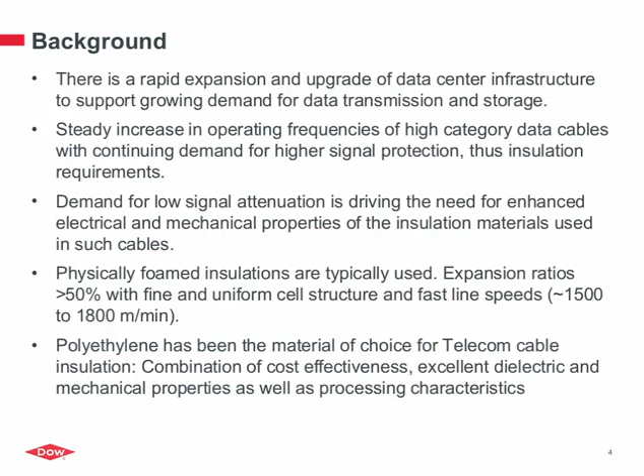On the next slide is our objective in doing this work and the targets. Our objective is to develop an improved high-density polyethylene cellular insulation. Obviously, there are products out there, and we want to improve even further. We would like to have this insulation in a single compound, so customers do not have to blend, eliminating this blending step, which leads to inhomogeneity issues at the cable manufacturing step. So our goal is to deliver a fully formulated, ready-to-use compound and eliminate any potential path for introducing a defect.

So in terms of the advantage of the proposed technology, number one, it's ADC-free. ADC stands for azodicarbonamide, or AZO in short, which is a known chemical foaming agent, also nucleating agent. And the reason for that is that in Europe specifically, there is a REACH directive where AZO has been put on the list of substances of very high concern. So obviously the industry would like to have a REACH compliant system that would not have this problem.

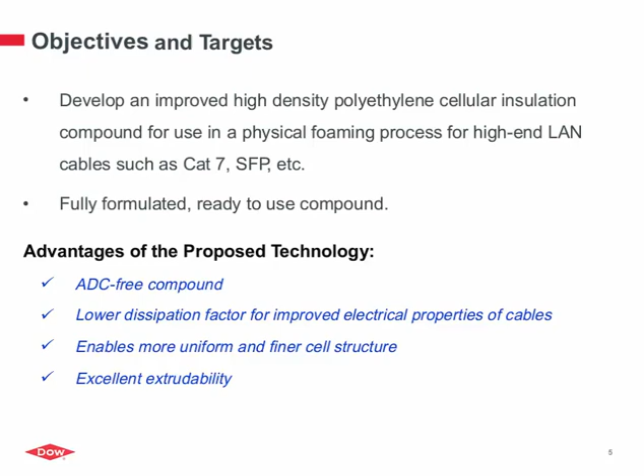The second is that we would like to have a lower dissipation factor compared to an incumbent high density system for improved electrical properties of the cable itself. Obviously, as I mentioned, this uniformity and the fine cell structure is needed. And because of the speed that these lines run, there needs to be a compound that processes with very good processability. So this line speed imposes some rheological constraints to deliver the processing speed.

Why is this important in terms of the dielectric materials' influence on the losses? Because what matters really are the losses in the cable itself. I captured here what is affected by the insulation of the dielectric material. Obviously, a lot more goes into a cable design, and a lot more can be done by the design to reduce the losses. But in terms of the dielectric insulation, the first one is the attenuation, which is signal loss. It is influenced by the dielectric insulation itself, its properties, which are the dissipation factor and the dielectric constant primarily.

And because the design of the cable imposes a conductor size, conductor separation, that will translate into the thickness of the insulation. So the dielectric materials come through that way as well. The impedance, which is anything that impedes the signal, it is the dielectric constant of the material and also uniform adhesion to the conductor. That's why these constructions, most of the time, are core and shell layers, and this foamed insulation will be in between.

Internal crosstalk also is affected by the insulation, and it comes through more on the mechanical integrity, because to reduce that, there needs to be twinning, twisting, and these induce radial forces on the insulation, so compressive forces. And if the insulation is not of robust mechanical properties, the foam insulation itself can collapse. So as I mentioned, this is not all. The overall performance of the cable is achieved by a combination of both, right? The non-polymer design parameters, but also the proper selection of the insulation material itself.

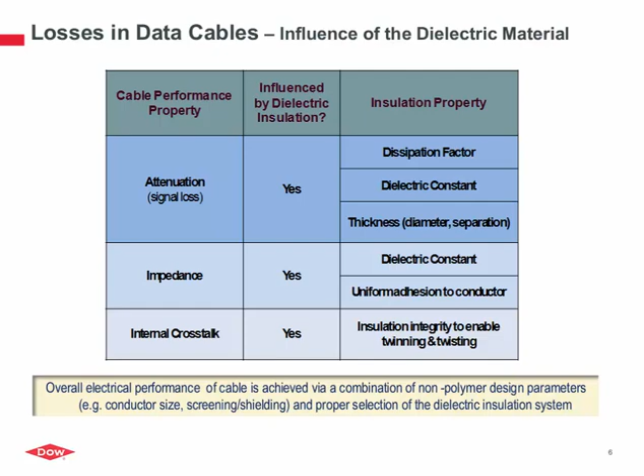Just a brief background of why we need to foam. Number one, what foaming means: if we say 50% foaming, that means 50% of something else, which is really the gas that is entrapped in these cells. And generally, the gases that are in the cells have much better dielectric properties, whether it's air, nitrogen, argon, or carbon dioxide. All of these have better dielectric properties than the polymer that is used. And so that's why when we foam, in this graph here, it's a simulated calculation of how the dissipation factor responds. And you can see it's a significant reduction in the dissipation factor by foaming. Here we are presenting the dielectric dissipation factor, but the same goes with the dielectric constant itself.

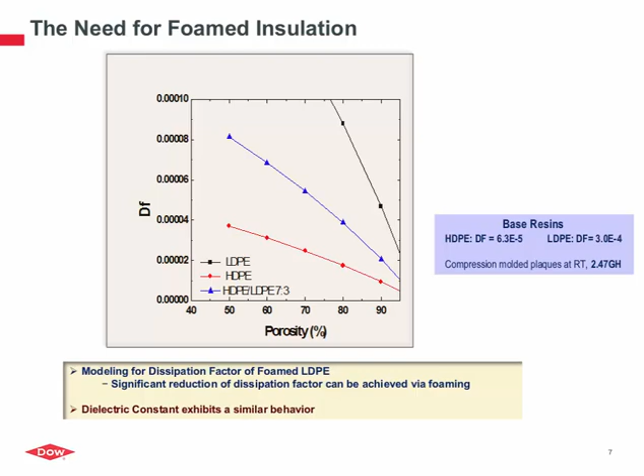Just a brief background of how the process generally works. It is generally a single screw system. Of course, lines are different. There are tandem lines and so forth. But for a high-level description, what we have is the polymer itself, or the polymer compound that is properly nucleated, that is fed into the extruder, melted and pressurized, and pumped to a high-pressure zone where the gas is injected. This is the foaming gas itself.

And then what happens, there is a gas-polymer mixture, and as the material is driven to a high pressure, there is dissolution of the gas in the polymer melt. So you have a homogeneous solution that has the gas, and as the pressure is released at the exit, then the foam expands, and I have pictures to show that. So this is the gas injection process, which is generally used for the topic that we are discussing today.

Obviously, there is the chemical foaming approach where the compound is prepared with the chemical foaming agent. That's what CFA stands for. And it decomposes during the melt extrusion step. What happens is, relatively speaking, a high level of the foaming agent is needed. It's easy to implement because it's ready to go. There is no gas injection metering and so forth. However, it's limited to about 45% foaming level. And there is the other issue: this is essentially an impurity. What we are introducing itself is an impurity, and when it decomposes, it results in byproducts that are also electrical impurities. So the combination of all of this does affect the electrical properties of the insulation.

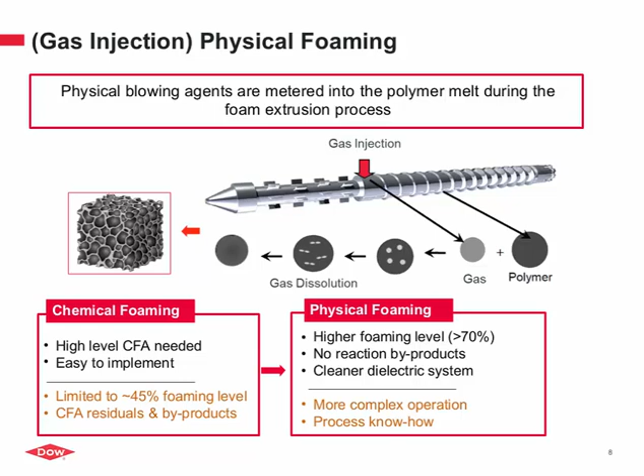Just to recap on what happens mechanism-wise in this foaming process. I already described the evolution of the melt plus gas, the formation of this polymer gas solution, and then with the exit and the rapid depressurization and cooling, and of course the presence of the nucleating agents, we enable the bubble growth and stabilization via the cooling process itself.

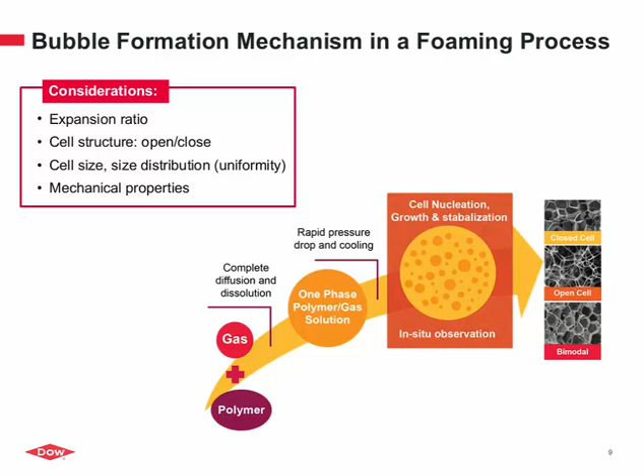When can we get a closed cell structure, an open cell structure, or a bimodal or multimodal structure? Of course, this is controlled by the rheology of the system that is put into the extruder. If we go to the next slide, why is this important? The cell structure, that is.

So from a mechanical standpoint, the foam compressive strength is significantly dependent on the presence or absence of open cells, and also at a similar density, a smaller cell size would result in a higher number of supporting walls. That means higher compressive strength.

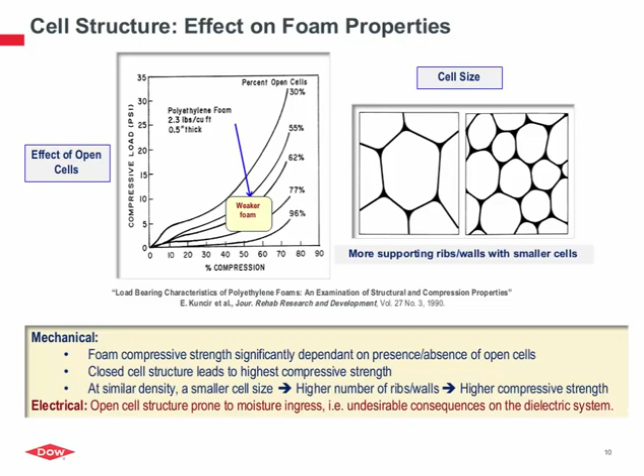So if we have a weakness in the dielectric layer, for whatever reason, contamination, moisture, or breakdown in the dielectric path, that would all result in higher spark faults, and of course the cable is not usable.

So where do we come in this space of how to make this foam? We come from the resin technology side. We come from the nucleating technology side. And of course, we look to the end user, and we work with cable manufacturers on the processing side. This is extremely important because equipment is different. Extruders are different in designs, whether it's the heating profile, the screw design, or the die tooling and so forth. All of that comes in making this high performance insulation.

However, from a material or compound designer standpoint, we look at the rheology, we look at the nucleating technology, and of course the resin technology itself. So it's really these three parameters that come together to deliver this high performance material.

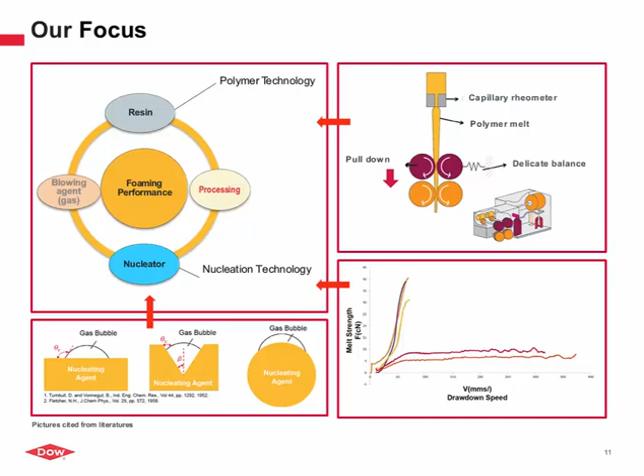So what we have done, we produced some foamed compositions in which we are using a typical high density based system, which is nucleated properly for gas injection foaming. We use that as a control. That's the CHDPE system. And then we use two modified systems, MHDPE1, modified high density system 1, and modified high density system 2.

All of these were prepared via compounding on a twin screw extruder, 18 millimeter 48 L/D, with the compounding processing information shown here. These were pelletized and dried prior to foaming on an extrusion line. We used a single screw extruder, 50 millimeter diameter, 40 L/D, at 7.5 kilograms per hour throughput. We used carbon dioxide as blowing agent injected on the extruder, with the temperature profile shown, and the extrusion line had a static mixing head in the post-injection section.

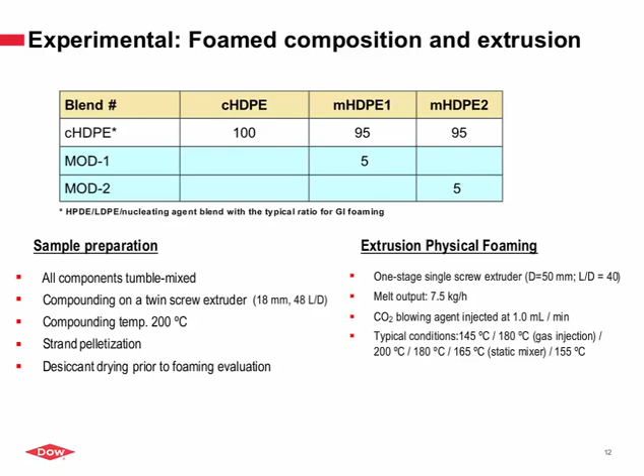For the electrical properties, we used an Agilent 8753ES analyzer on 50 mil plaques. These are solid plaques, so all data we are showing are on solid plaque, at a frequency of 2.47 gigahertz for the dissipation factor and the dielectric constant. The density is measured according to ASTM D792, and the expansion ratio is calculated using the specific gravity of the foam versus the unfoamed material.

For the cell structure, we analyze the extruded foam with scanning electron microscopy, and we do image analysis on the electron microscope pictures themselves. That data is put into JMP, a statistical package, and we use a Tukey-Kramer type of model.

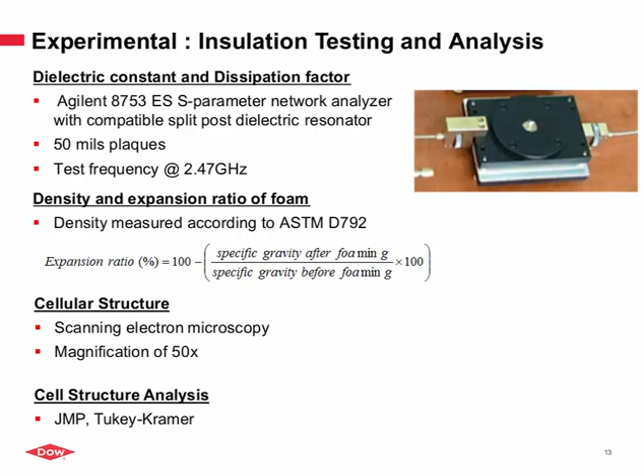From an electrical standpoint, the control has a typical dissipation factor and dielectric constant for these systems. Modified system 1 has a slightly lower dielectric constant, which is in the positive direction, and the dissipation factor is more or less equivalent to the control. Modified 2 has a slightly lower dielectric constant; however, the dissipation factor was much higher compared to the control.

I'm showing here the extrudate coming out of this foaming line. One observation is that in the control system, we can see a transparent region at the die exit, which is indicative of really unfoamed melt that is coming out of the extruder die. And the foaming is delayed post-die.

Comparatively speaking, both the modified systems do show significantly earlier foaming, which is indicated, number one, by the absence of this transparent region, which is polymer melt. And the second is when we measure the extrudate foaming angle, both modified systems had about 46 degrees theta angle versus about 15 degrees. That's really 3 times the expansion angle compared to the control system, which is qualitatively indicative of improved foaming for both modified systems.

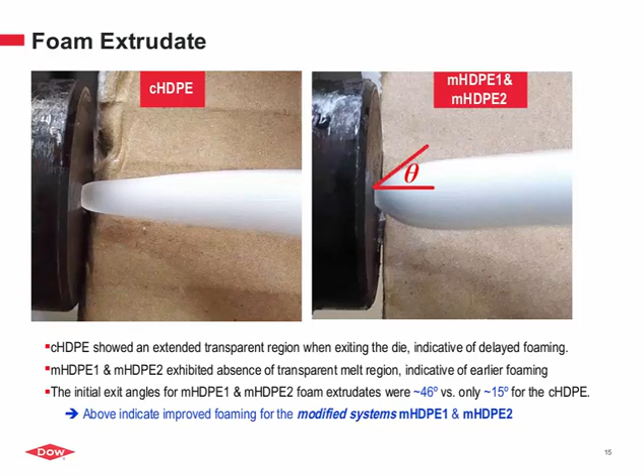Obviously, this is not enough. One has to go to the microstructure itself, do the microscopy work, and see if this is real. So these are the microscopy images, SEM pictures. The scale is 1 millimeter, shown at the bottom of each image. And what one can see, number one, qualitatively, there is a reduced number of large cells in both modified systems compared to the control. And also there is a larger number of total cells in both modified systems compared to the control.

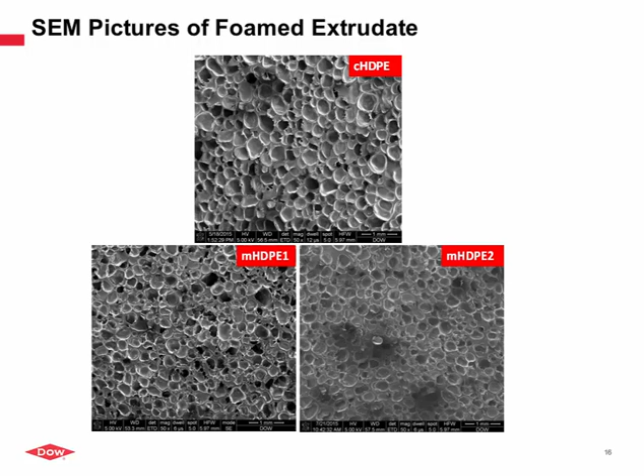So when we go to the quantitative analysis via the image analysis, and this is a compilation of several samples, what we see in the control system is a broader size distribution. Number one, the mean cell size is about 250 microns. The total number of cells is about 400. Comparatively speaking, in the two modified systems, the average is about 189 microns compared to 252, and in the second modified, it's about 213. For both modified, you can see it's 534 cells and 472 respectively versus about 400 for the control.

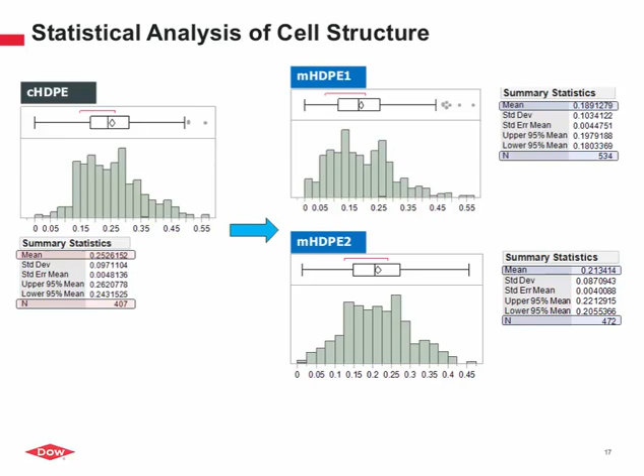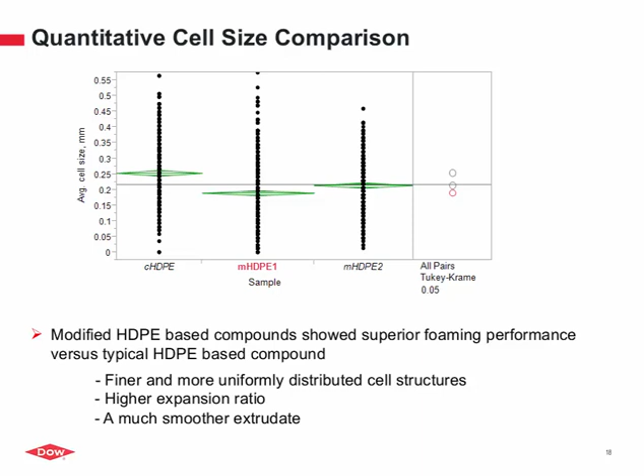So these modified compounds showed superior foaming performance versus the typical HDPE system, finer and more uniformly distributed cell structures, and a higher expansion ratio, which will come in the next slide. From the images, we also saw a very smooth extrudate coming out of the line. To summarize the foaming performance, for average cell size, both systems clearly differ from the control. The expansion ratio as well, which is important. So we have about 73%. These were all extruded under the same processing conditions, so we are comparing compound differences. Both compounds show a much higher level of foaming compared to the control: larger cell population, finer cell size on average, and a higher expansion ratio.

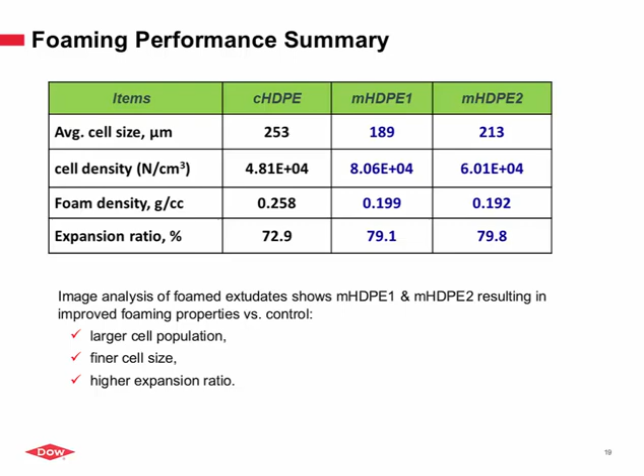So in summary, we have developed a ready-to-use, fully formulated compound for physically foamed data cable insulation, exhibiting the following characteristics. Number one, this is an ADC-free system. It exhibits lower loss properties compared to the conventional control. We have also demonstrated a more uniform and finer cell structure, which is necessary for these thin wall constructions, and it should have better compressive strength compared to a system producing a larger cell size. And rheological characteristics are important; we could not have achieved this without the proper rheological properties. We have had presentations at IWCS before on this topic, if you want to refer to them. And we have shown that these extrude quite well in terms of processability of the foam itself.

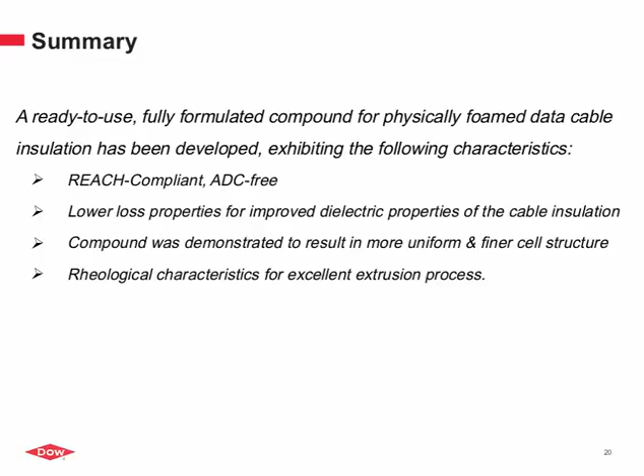Are there any physical property differences in physically foamed insulation as compared to chemically foamed?

In most cases, the key difference is really the line speed, because it's a pre-homogenized, pre-distributed system that is convenient for usage. I would think the material properties would be dominated by the base resin system used, unless there is plasticization, and that has been reported in the literature, of the byproducts of the chemical foaming agent that could plasticize the material and may impact the physical properties.

Okay. Next question. Are co-extrusions necessary to provide for a skin layer in foamed insulations to provide for the physical integrity of the insulation? If so, does this slow down line speeds below the 1,500 meters per minute speeds? No, generally no. The skin and the skin material, which is the core, the inner layer and the outer layer, generally are made of a compound or a polymer that is designed for high speed. We have done skin foam core structures, and we have not seen that limiting the line speed.